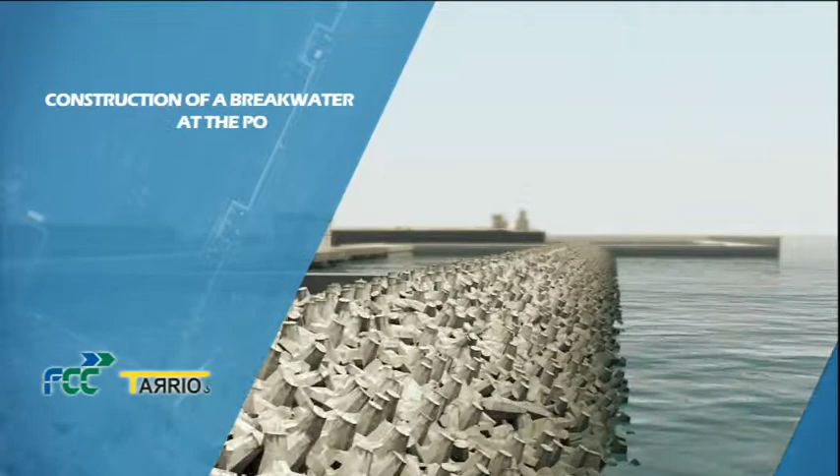In this video, the FCC-Tarrio joint venture presents a summary of its proposal for the construction of the mixed breakwater at the Port of Açu in São João da Barra, providing the project with all the skill and experience gained in the execution of works of similar characteristics.

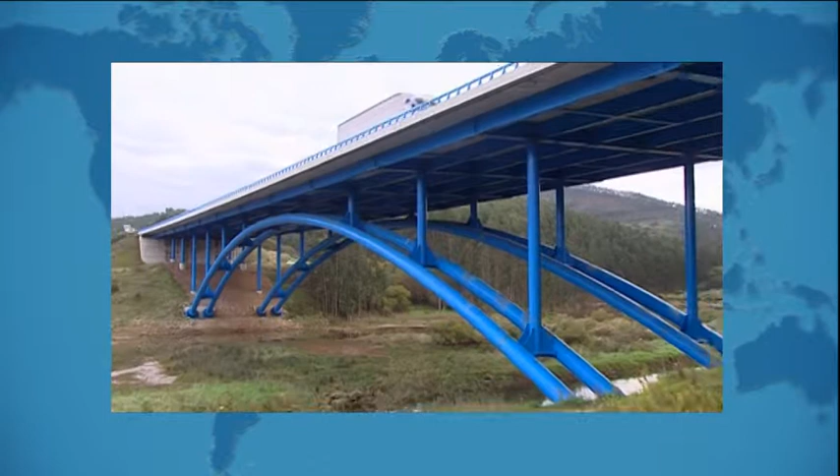FCC is the parent company of one of Europe's largest and most profitable groups in the fields of public services, environment, infrastructure and renewable energy. With over 100 years' experience of building roads, railway lines, ports, waterworks and buildings, FCC is a benchmark in the history of construction.

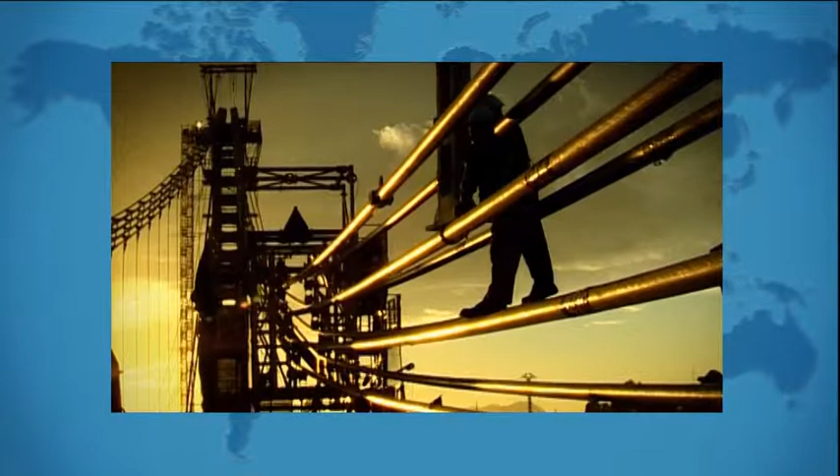It is present in more than 50 countries on 4 continents, where it invests in technology, improving processes and developing eco-efficient communities. Thus, in 2011, international markets accounted for 52% of FCC's billings. All this is possible thanks to a workforce that exceeds 90,000 employees and to the implementation of management, sustainability and quality systems that assure the best possible service.

At FCC, as professionals, we strive to overcome the latest technological challenges and to generate the well-being of future society, making our commitment to build a better world for all a reality.

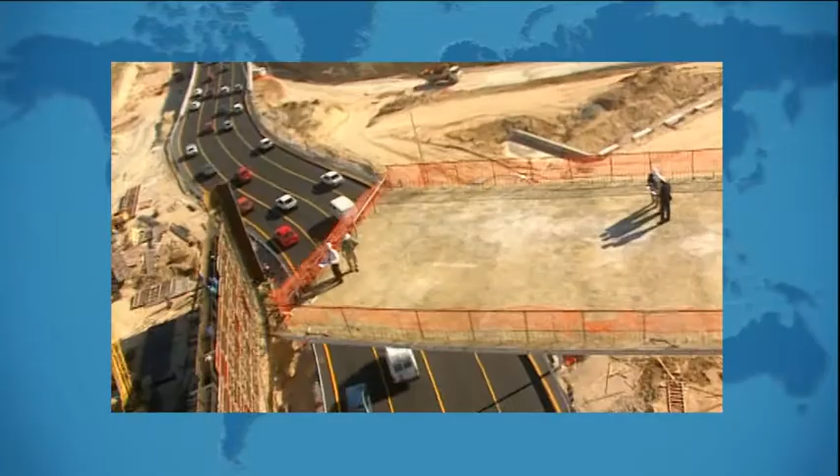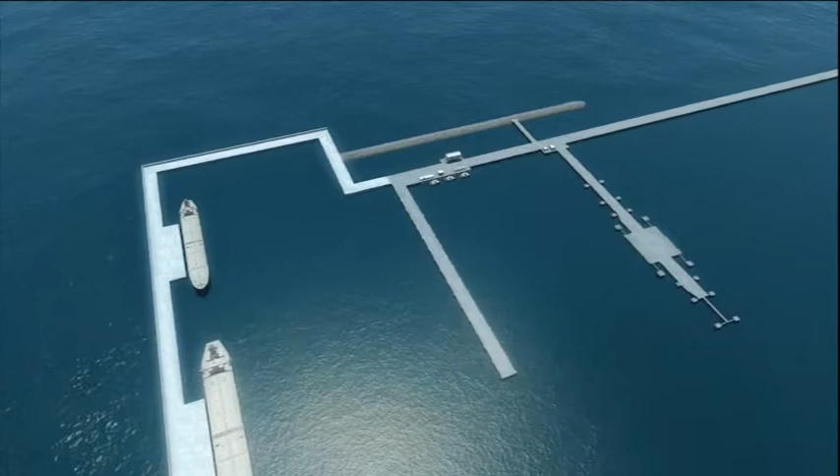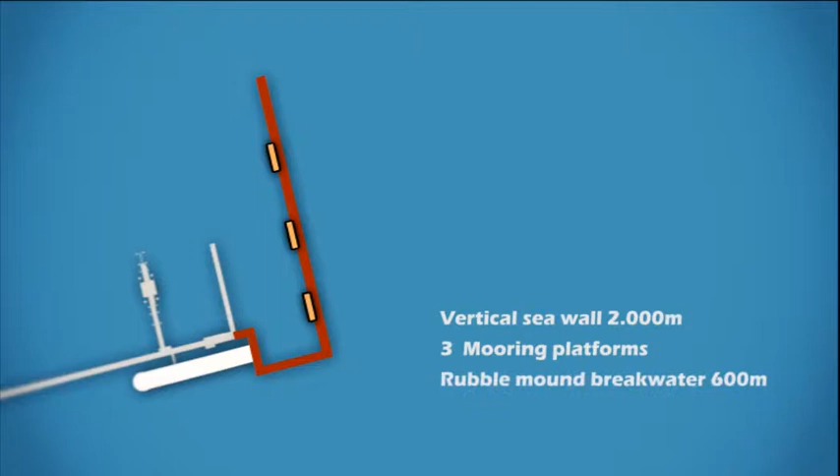Description of the project. The Mixed Breakwater project is of considerable technological interest. It includes the construction of a vertical seawall approximately 2,000 meters long, 3 mooring platforms and a 600-meter long rubble mound breakwater, requiring the building of 49 concrete caissons.

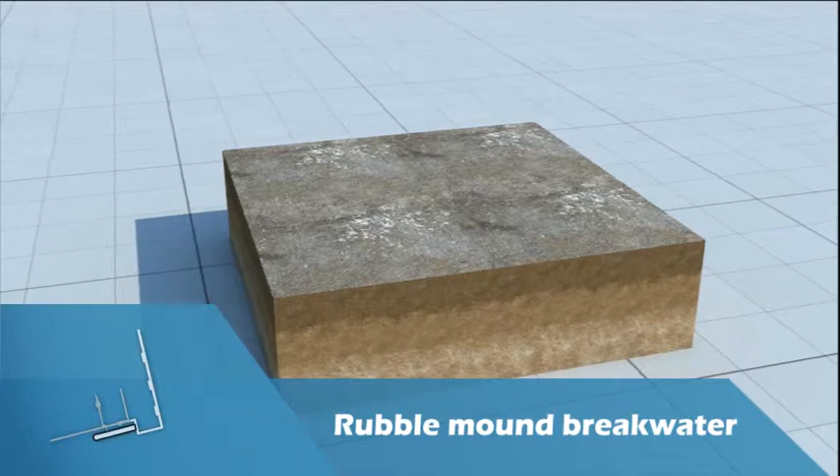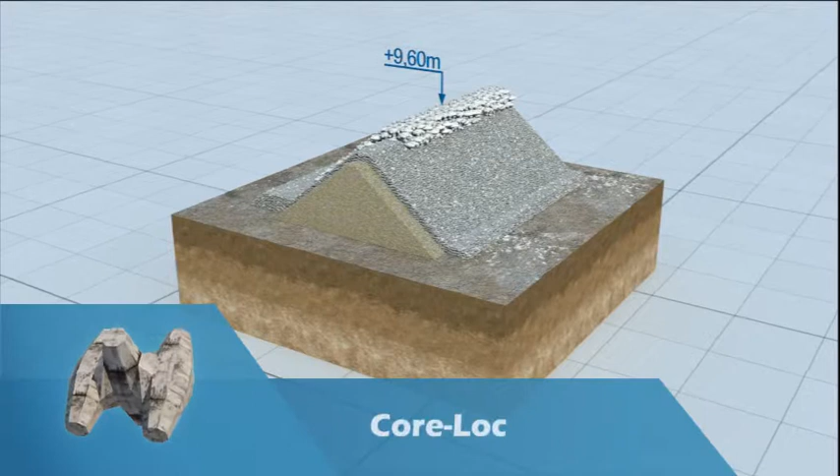The rubble mound breakwater will be built of a core of 1 to 500 kilogram rock fill, crowned at a +5.5 meter level, onto which a 1.7 meter thick filtering layer will be laid, using 0.5 to 2 ton rock fill. Finally, on the sea side, a protective layer will be laid, composed of 3.9 cubic meter blocks of Core-Loc concrete, crowned at the +9.6 meter level, and on the inner side, a mantle of 2 to 4 ton rock fill.

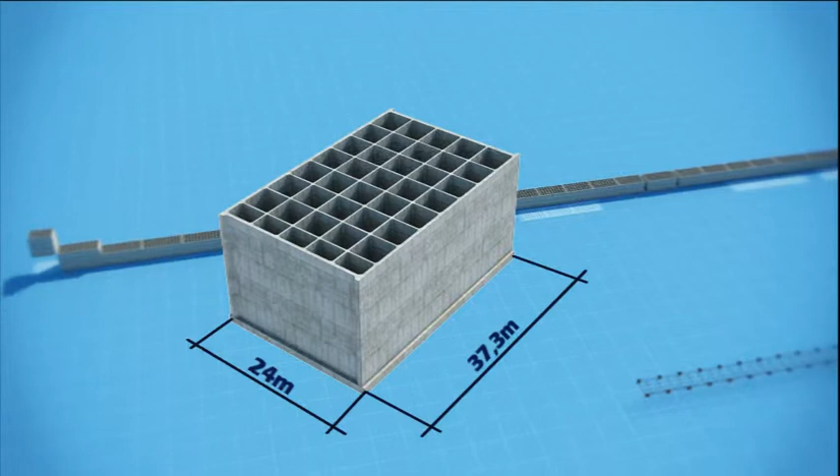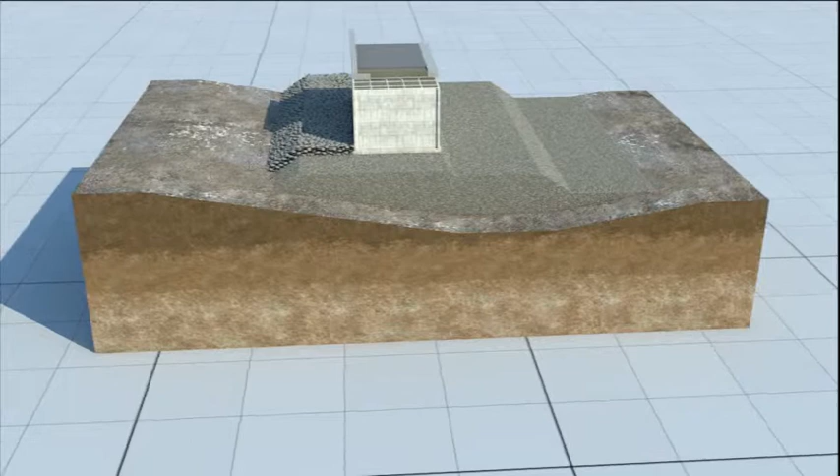The vertical seawall will be built with 40 reinforced concrete caissons, lightened with rectangular cells, 24 meters wide and 37.3 to 58.2 meters long, resting at the -15 and -26 meter levels, depending on the section. The foundation bed will be built with 10 to 100 kilogram rock fill, protected from wave action on the sea side by 2 to 3 ton rock fill, and on the inner side with 500 kilogram to 1 ton rock fill. The shoulder will be formed of a section of reinforced concrete crowned at the +10 meter level.

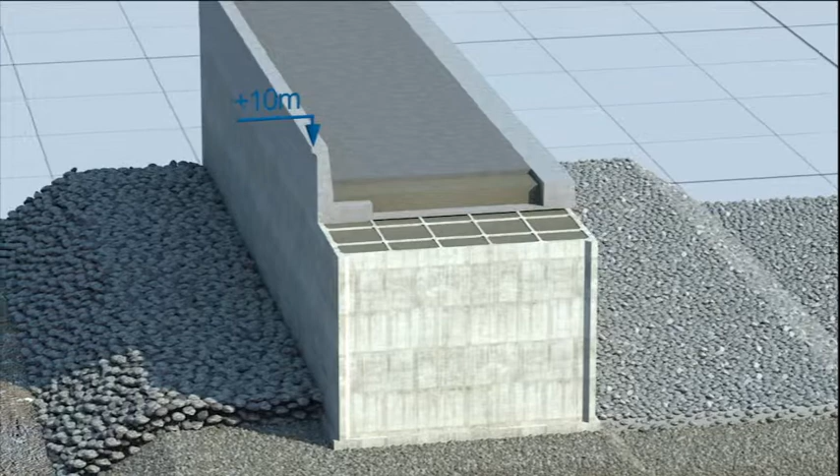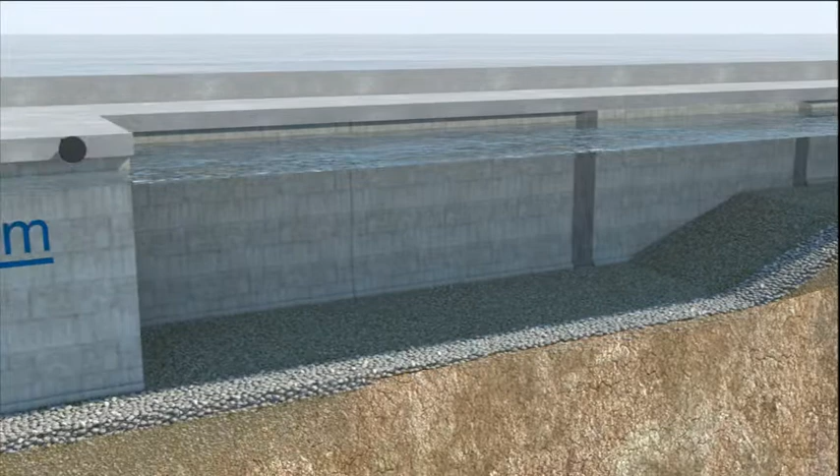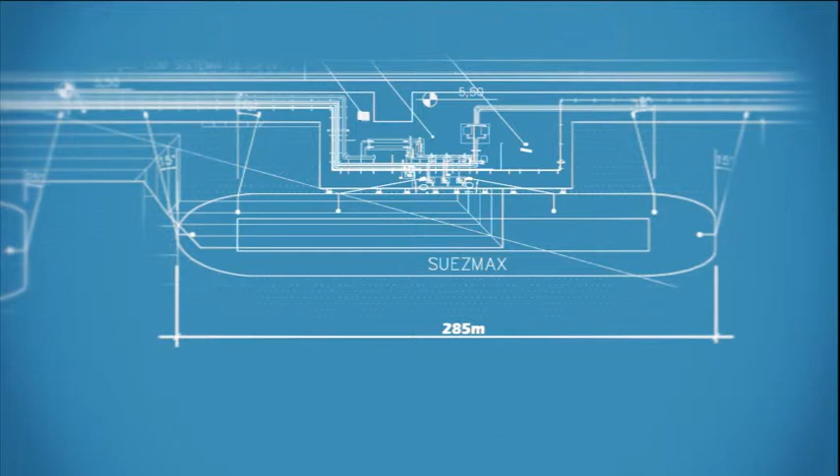Both the width and the height of the foundation trench will be adapted to the geotechnical profile, with the dredging level varying from -25 to -35 meters. In the shelter of the vertical seawall, the 3 mooring platforms will be built, 132 meters long and 25 meters wide, each with 3 caissons. The caissons for the platform at the back of the dock, for Suezmax type vessels, will rest at the -21 meter level, while those for the other 2 platforms for VLCC type vessels will rest at the -26 meter level.

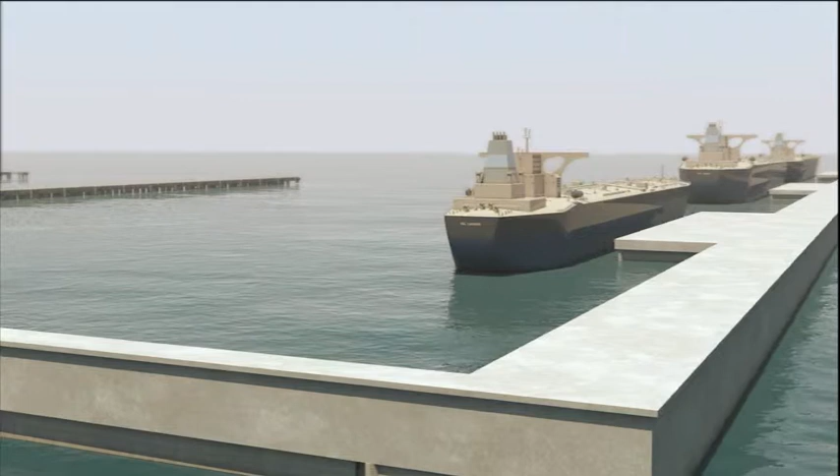The key to the execution of this complex project hinges on the building of the new vertical seawall, which calls for a high degree of technological know-how and stringent control of the proposed procedures. The joint venture has over 20 years' experience of working with this type of technology, having built over 10 kilometers of seawalls of similar characteristics using its own resources all around the world, as well as undertaking other works under other joint venture arrangements.

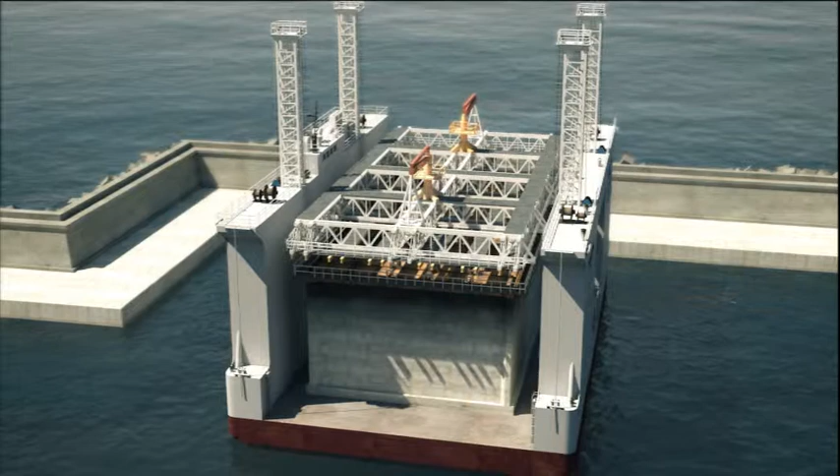Given its extensive experience, the geographical site for the project and the previously established timeframes for the execution, contractual frameworks, the joint venture considers as critical elements in the construction process the manufacture and subsequent sinking of the 49 concrete caissons necessary, which will be largely dependent on the conditions at sea at the time.

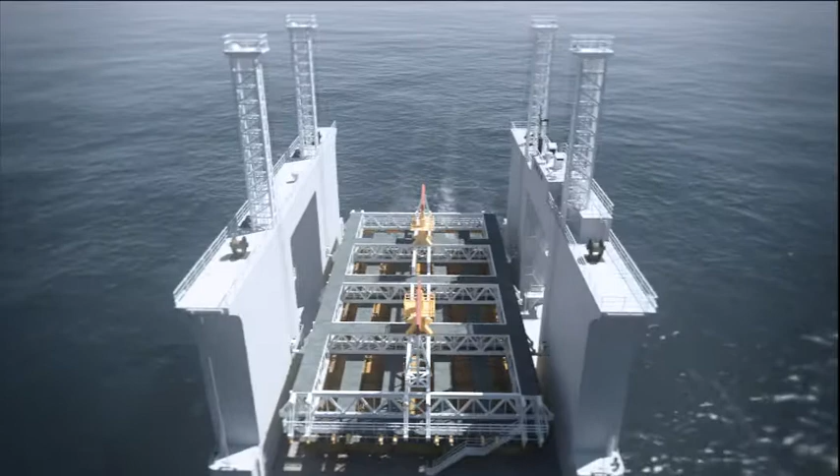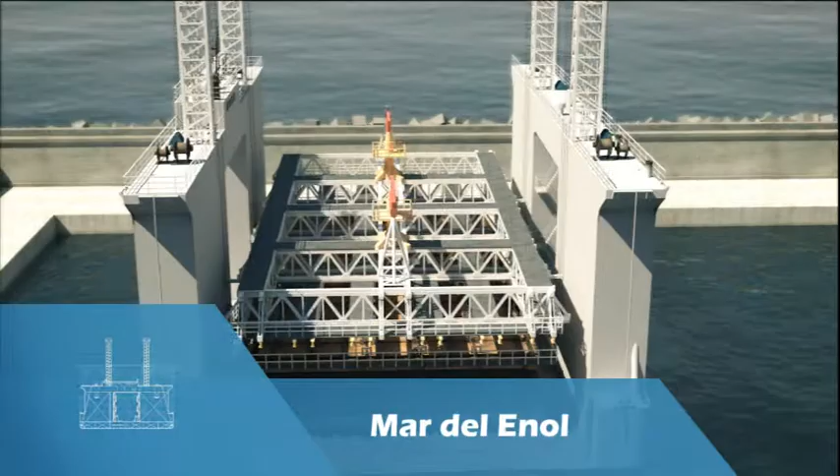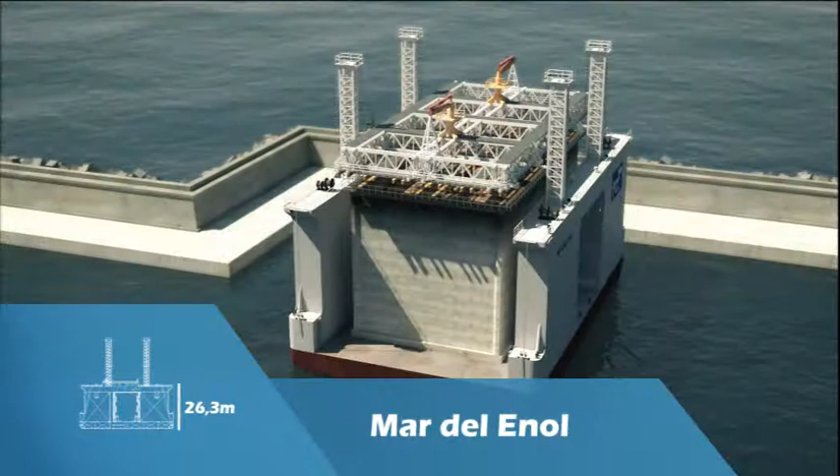For this reason, we have opted to assign to the project 2 floating docks owned by the joint venture, the Mar del Aneto and the Mar del Enol, which have sufficient capacity to build all the designed caissons by the scheduled deadlines. The Mar del Enol is the larger of the two, with dimensions at the base of 60 by 40 meters, equivalent to half a football field, and a height, not counting the towers, of 26.3 meters. Its manufacturing performance rates are 8 days for the 18-meter deep caisson and 10 days for the 29-meter one.

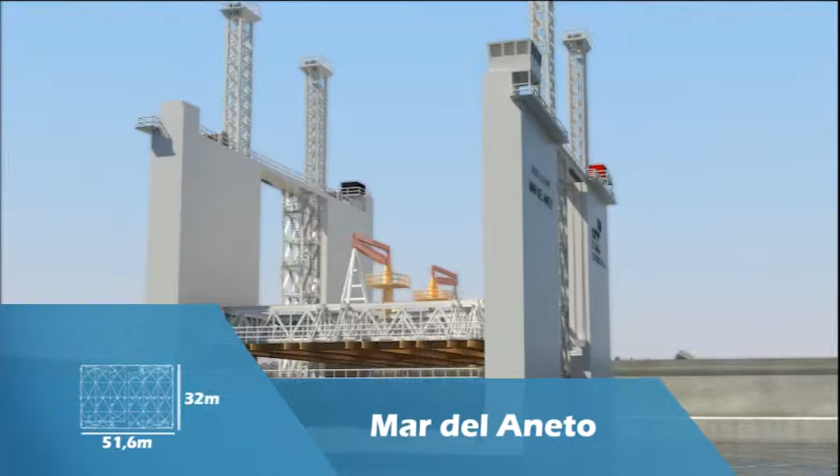The Mar del Aneto, with dimensions of 51.6 by 32 meters at the base and 28.2 meters high, obtains performance rates of 7 days for the 18-meter deep caisson, 8.5 days for the 24-meter caisson and 10 days for the 29-meter one.

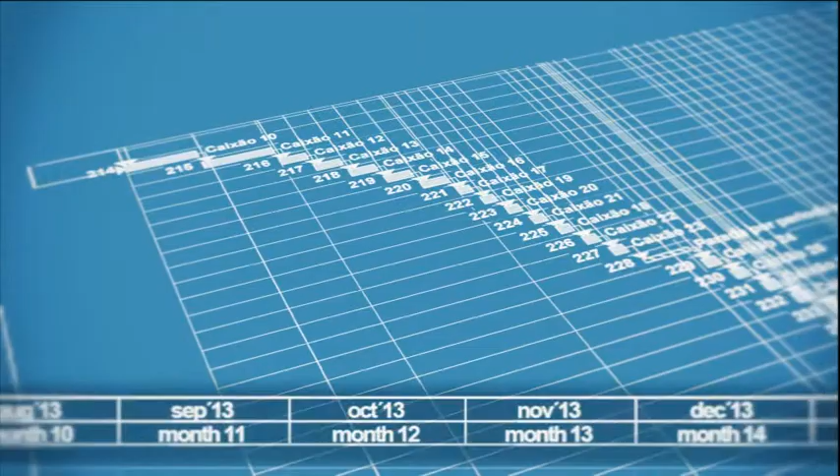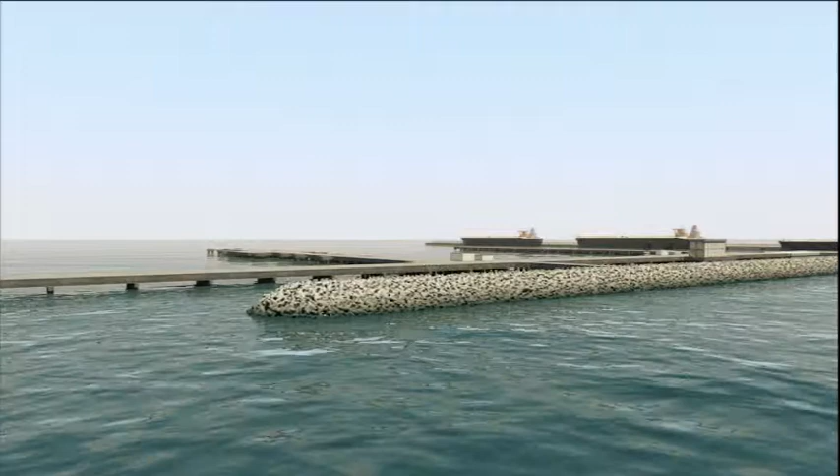In view of the maritime climate, we have considered the period between October and April as the optimal time window for the work at sea, particularly the sinking of the caissons. This will allow considerable leeway in terms of meeting deadlines to assure the successful completion of the works. Nevertheless, as a standard practice at FCC, a wave monitoring and prediction system will be implemented at the site to obtain on-the-spot information about the behavior of the marine environment when it comes to undertaking the more sensitive activities.

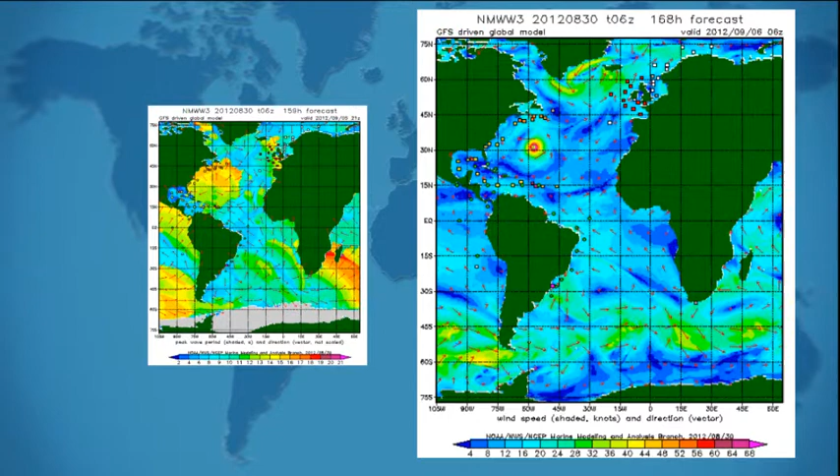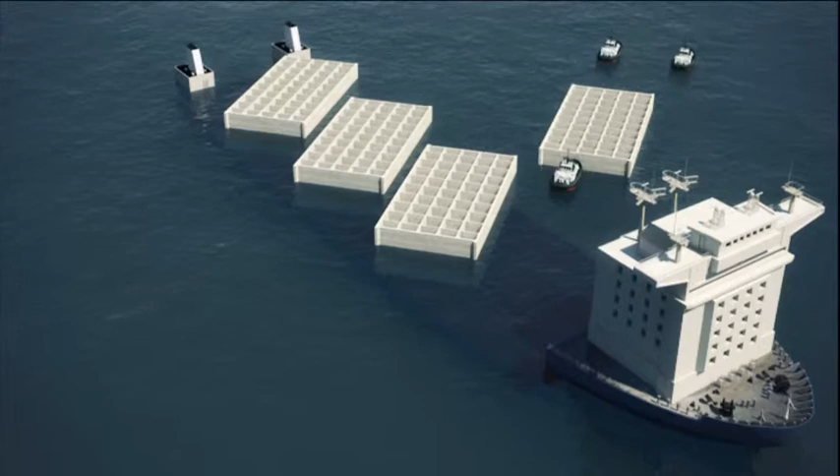In order to meet the commissioning needs, the works have been scheduled in 4 phases. Phase 1. It is planned to manufacture a total of 9 caissons initially in Spain, at the port of Algeciras, Cádiz province, which will be transported to Brazil, to an auxiliary port, initially Angra dos Reis Bay in Rio de Janeiro state, using a semi-submersible vessel that will carry up to 4 caissons per trip.

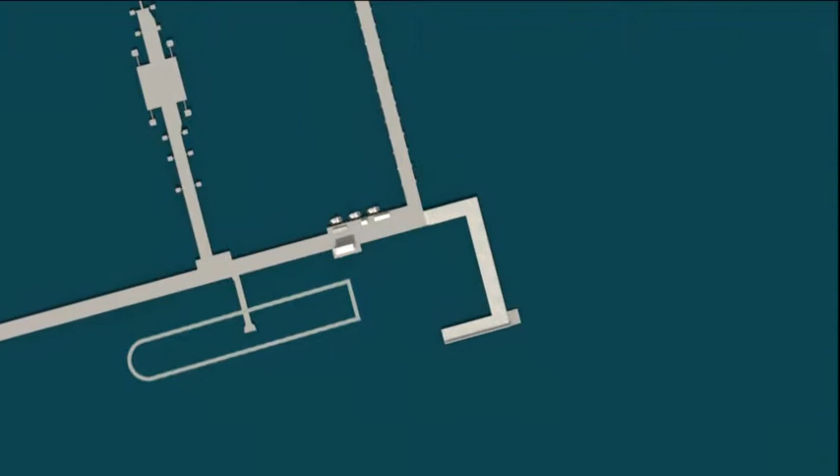The caissons will then be towed to the port of Açu and sunk to form a U-shaped temporary seawall to house the floating docks and so continue with the caisson manufacture. The manufacture of these first 9 caissons will commence in January 2013.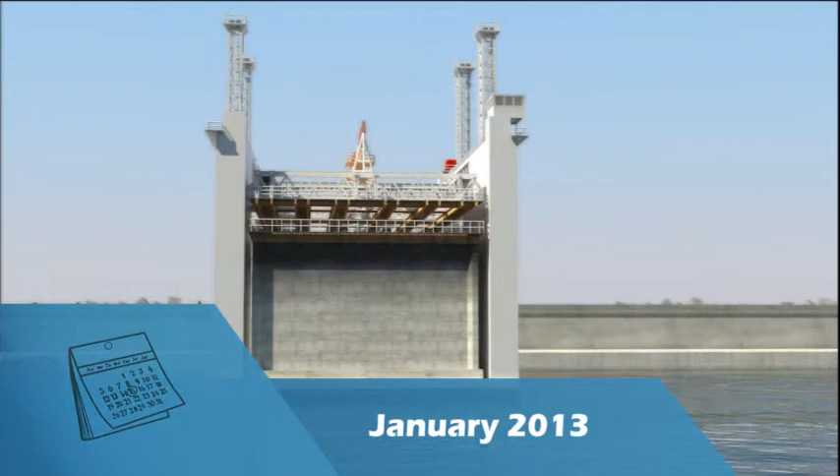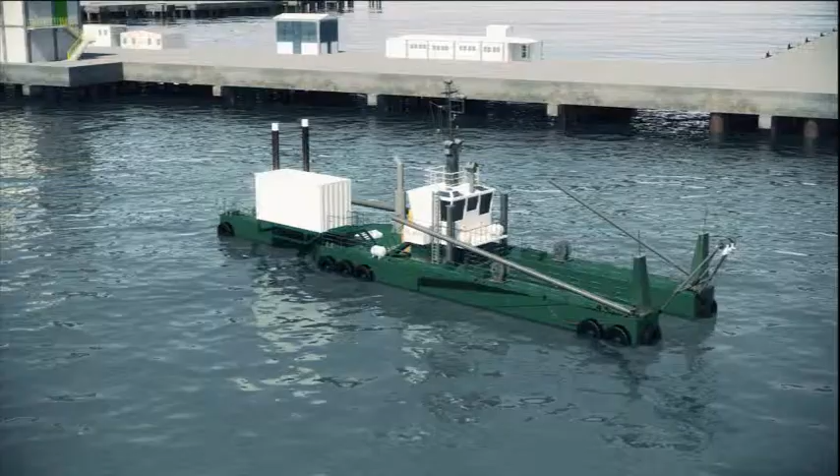In coordination with these tasks and following bathymetric studies of the area, works will begin at the port of Açu in January 2013 to prepare the foundation bed for the concrete caissons, consisting of dredging, tipping rockfill, and subsequently leveling the area necessary for the first sinking operations. This is the moment when the construction of the first 438 meters of the rubble mound breakwater will also begin.

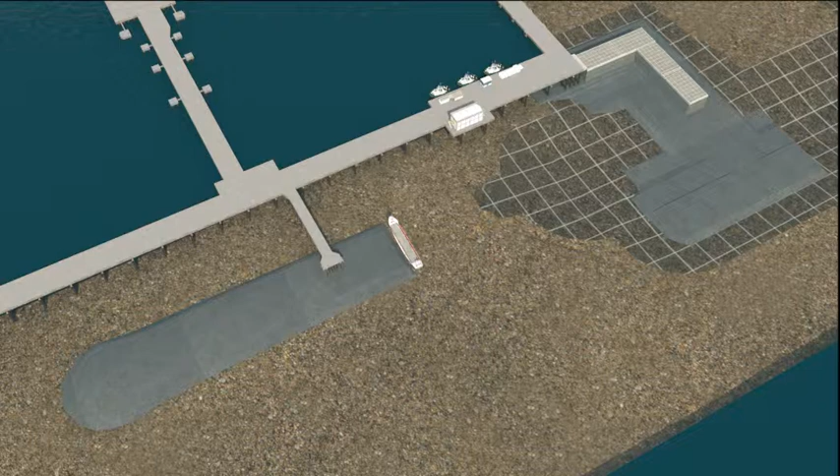A first stage has been planned, during which the core will be tipped at sea up to the -5 meter level, followed by a second stage when the remaining core, protective mantles and Core-Loc blocks will be laid using land-based means, with the crowning being completed when the withdrawal tasks are carried out.

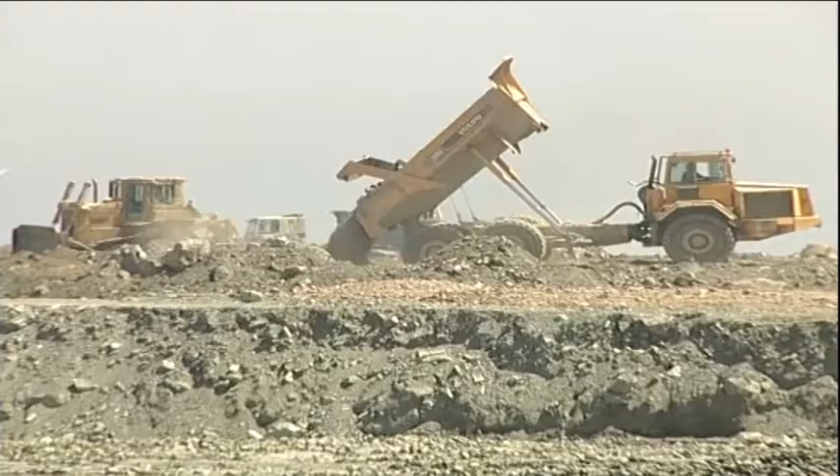The monthly aggregate needs for the building of the bed and also for the protective mantles, concrete, etc. will be covered by the stockpile volumes currently available at the port of Açu and the quarry. The shortfall of material will be covered by the Itaoca quarry operation, 70 kilometers away from the worksite, where the extraction rate will be coordinated in accordance with the needs on site.

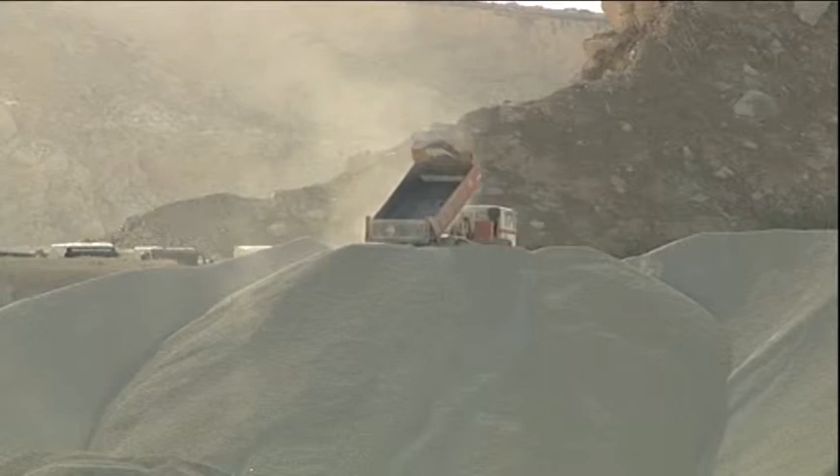The transport of the first caissons from Spain to Brazil will take place in February 2013. They will be unloaded in a deep sheltered area at an auxiliary port, initially at Angra dos Reis Bay. The first caissons will be taken to the port of Açu and sunk immediately after the arrival of the first semi-submersible vessel in early March 2013, attempting to reduce to the minimum the time needed for provisional stockpiling while making optimal use of the most favorable windows for the sinking tasks.

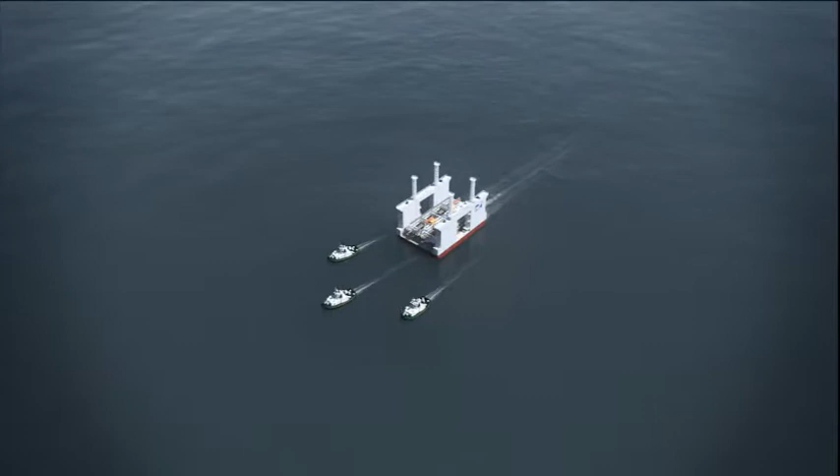Once caisson number 9 has been built in Spain, the preparatory work to move the floating docks to Angra dos Reis will begin, first mobilizing the Mar del Aneto and later the Mar del Anol. Once positioned, the required official approvals for the floating docks will be obtained, coinciding with the completion of the preparatory work at Açu of the planned U-shaped sheltered area.

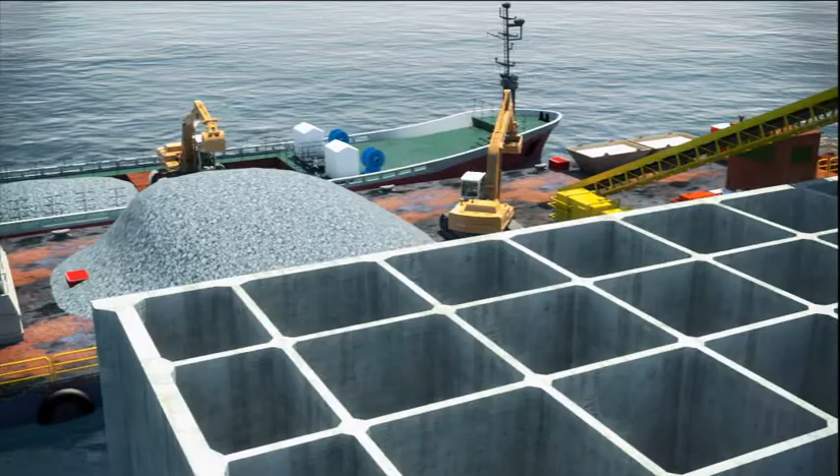The sinking of the caissons during this first stage will be followed by a set of maritime actions designed to assure the structure's stability. As soon as possible, the backfilling of cells will begin, and the joints between caissons will be sealed, preparing the surface for other actions, and the outer and inner protective mantles will also be laid.

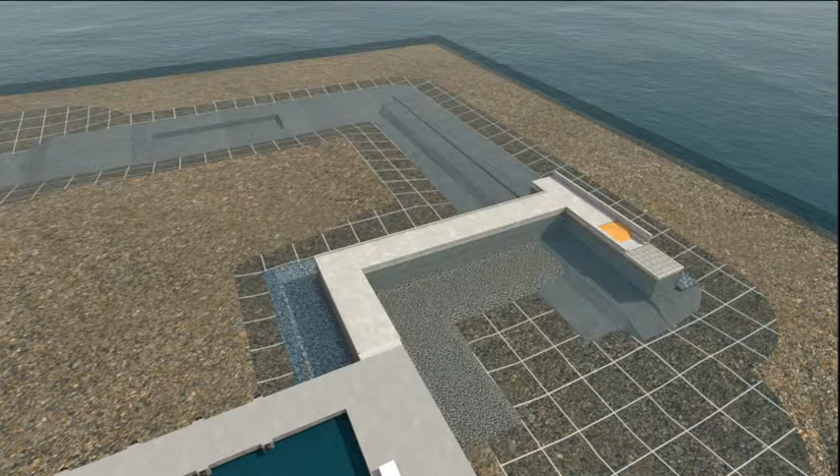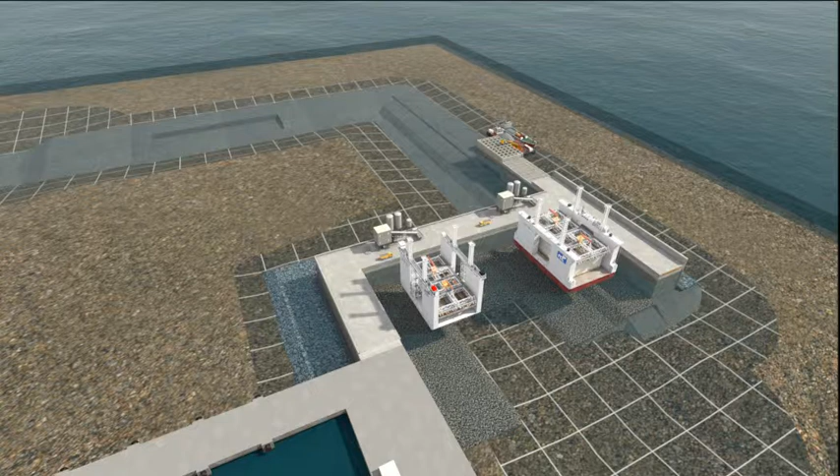A set of auxiliary operations on the level will take place at this point, to build the superstructure of the seawall, building the concrete slab and the provisional L-shaped wall. This will act as a shoulder to provide sufficient shelter while the auxiliary installations are operational, as well as for the floating docks themselves. Once the wall has been built and the necessary permits have been obtained, Phase 2 can begin.

Phase 2. Phase 2 consists of building the two alignments of the C-shaped vertical seawall, composed of 11 caissons, and the first mooring line, 132 meters long, with 3 caissons, as well as the superstructure for the wall that will shelter the floating docks in their second position for the building of the remaining caissons.

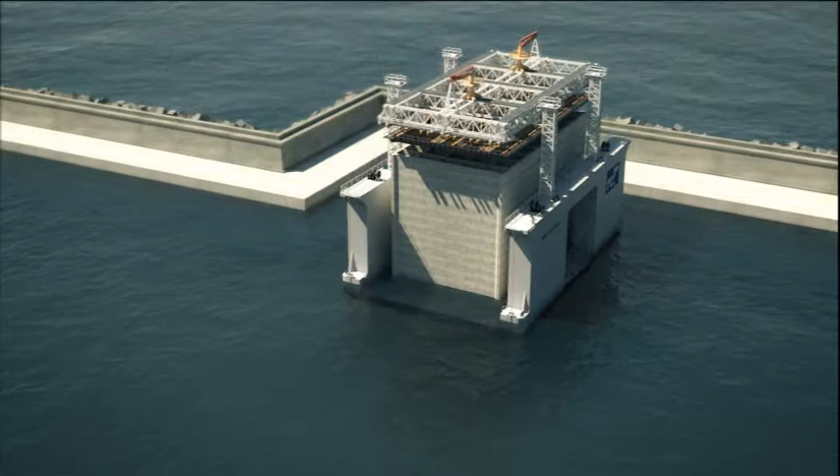The manufacture of the caissons will begin when the most favorable maritime season begins, allowing us to make optimal use of the sinking windows to assure constant sequential growth of the new seawall with practically no downtime. As soon as the shoulder works allow, the floating docks will be moved to their new sheltered position.

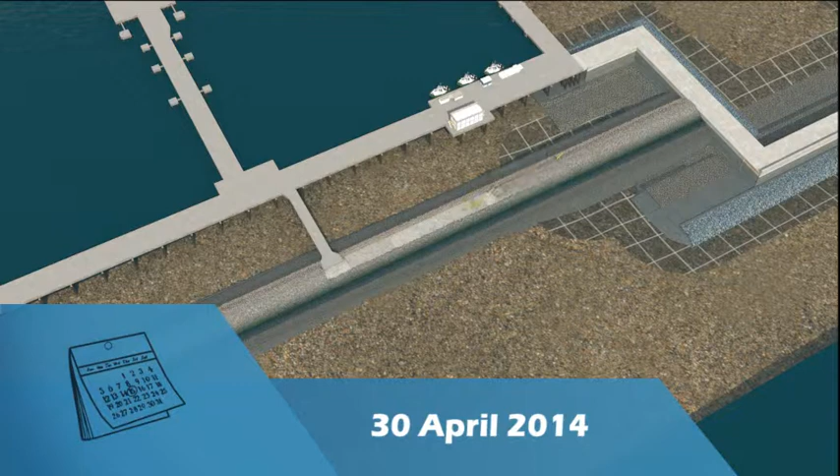Phase 3. Phase 3 of the works will begin once the floating docks have been relocated to their second position, resuming the caisson manufacture process. As the first location will now be free, work will be able to continue to build the rubble mound breakwater, with completion scheduled for April 2014, in accordance with the stipulated conditions.

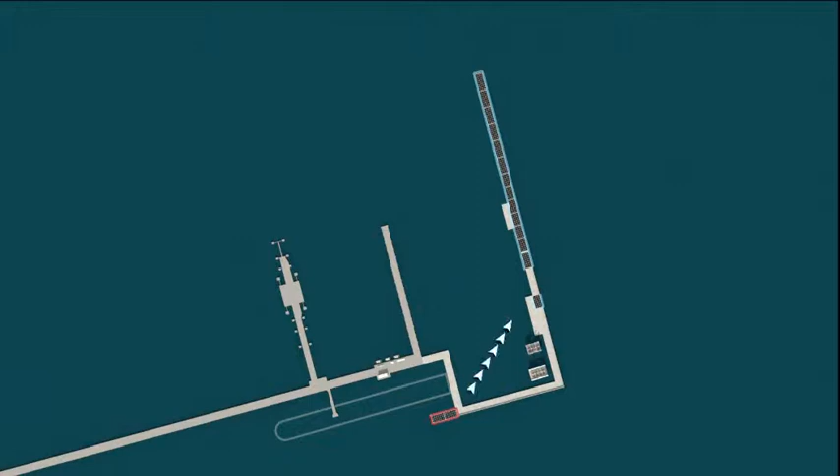During this stage, it is planned to build the vertical wall alignment as far as 300 meters from its northern end, by building 14 caissons and repositioning the 2 caissons that were provisionally sunk during Stage 1 to provide shelter for the floating docks. Meanwhile, the sinking, backfilling, laying of protective mantles and subsequent superstructure works will continue, building the edge girder and protective shoulder. The 3 caissons for the second mooring platform will also be laid during this phase.

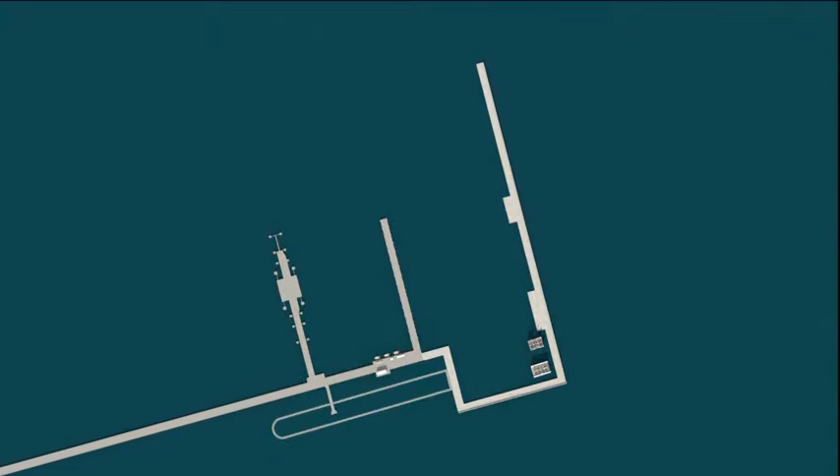Phase 4. Finally, Phase 4 will consist of building the final 300 meters of the seawall and completing the 2 remaining mooring platforms, with a total of 10 caissons plus the linking slab with the existing seawall. These tasks will be completed by the 31st of March 2015, after which the provisional pier will be demobilized and the worksite restored, with final completion scheduled for the 30th of July 2015.

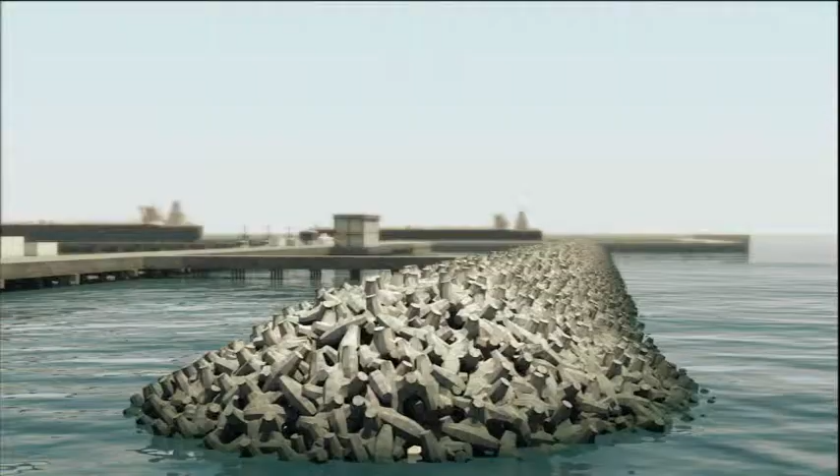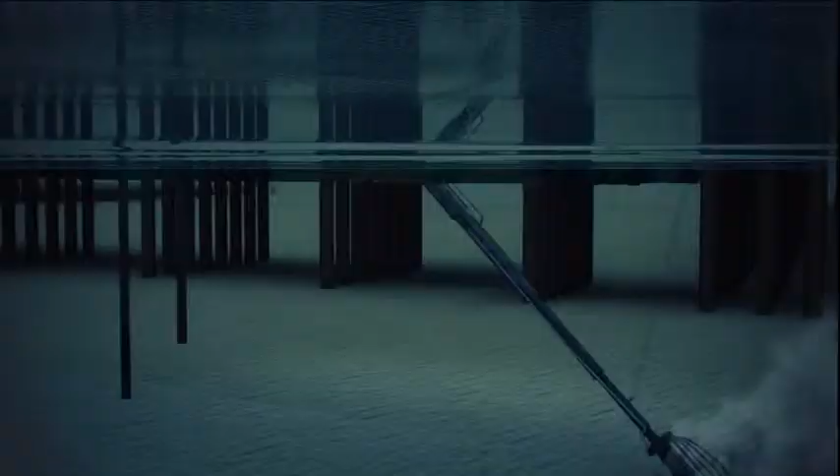The joint venture can offer its extensive experience in undertaking similar works and assure that the works are completed successfully, assigning a human team with considerable experience and allocating all the technical resources necessary to execute the works in accordance with the proposed schedule, such that they are compatible with ongoing operations at the port of Açu. The technical and financial bid submitted includes all the relevant forecasts and conditioning factors to assure that the works are carried out in strict compliance with the guidelines set out in the terms and conditions of tender.